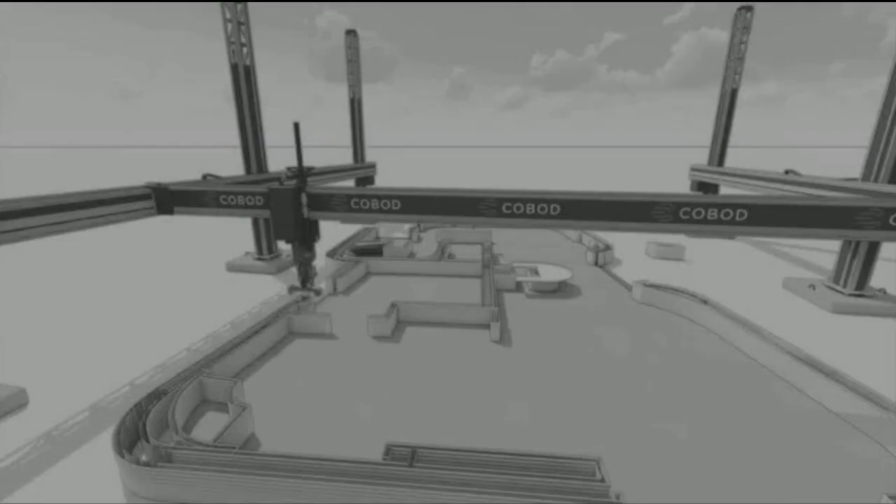3D printing technology is an incredibly fast growing technology which is accomplishing some incredible feats. So, if this is the case, are 3D printed homes the future of housing? Can 3D printed homes reduce the cost of rent and eradicate homelessness? Let's find out.

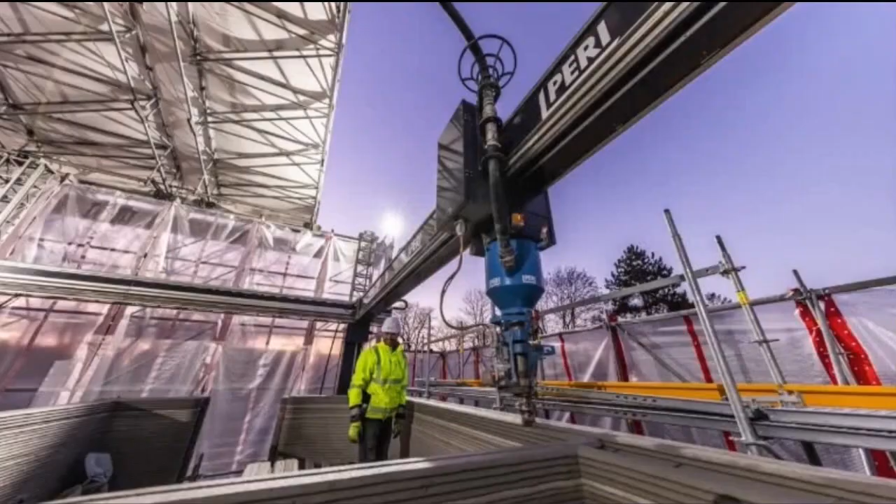When you think of 3D printed homes, you are likely to imagine futuristic homes engineered by technologies made for the world's millionaires. But you may be surprised to hear that 3D printed homes are a phenomenon of the present and are emerging all over the developing world.

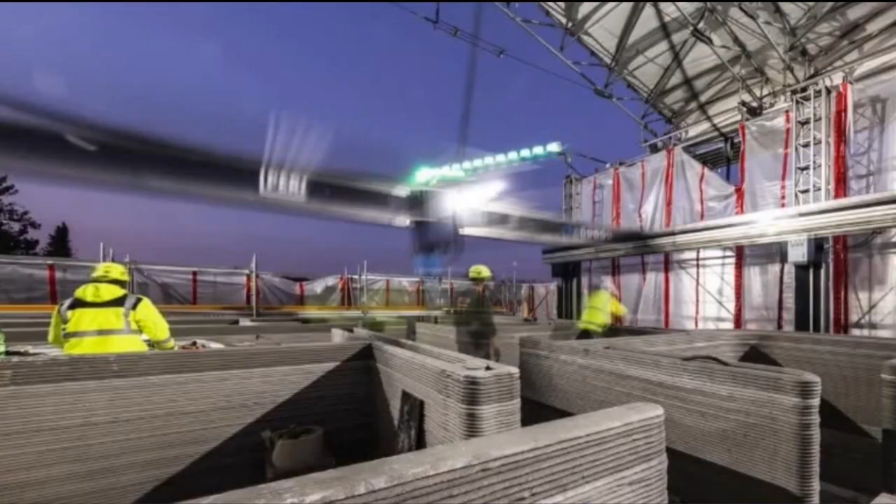The ability to print 3D homes for a low cost is changing the landscape of the developing world as governmental organizations, non-profits and housing construction companies collaborate to serve the homeless and reduce rental prices by creating affordable housing. With all this being said, let's now take a look at how and why 3D printing homes is changing the housing landscape.

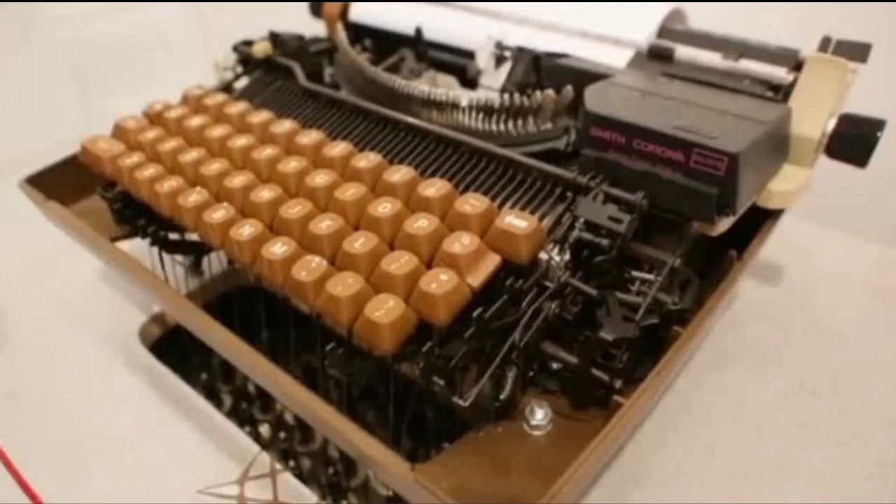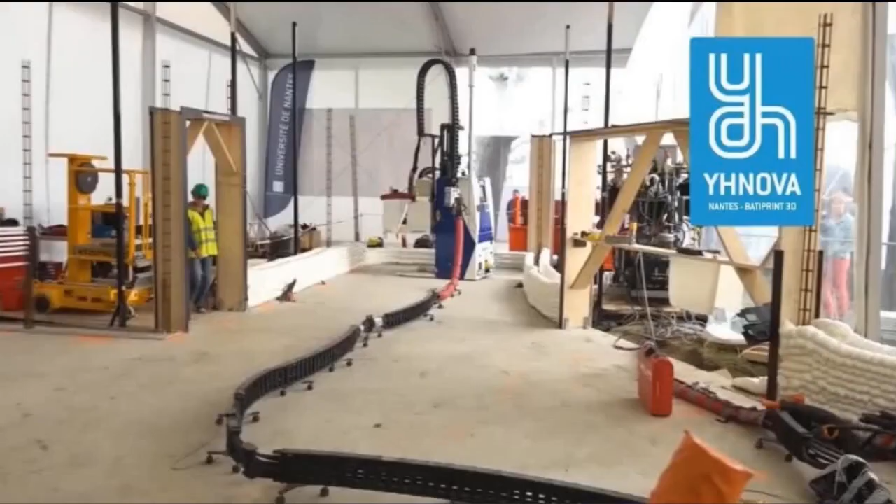If you look back at the mechanism of typewriters, the first machine you can remember that looked like a typewriter, you will notice that the letter formed by the ink sits on top of the page surface. The traditional printer at your home works in the same manner. It prints letters that sit on top of the page surface. Therefore, if you were to print on the same page numerous times, you find out that the ink will stack up on the page. Now, a 3D printer works by capitalizing on this same theory.

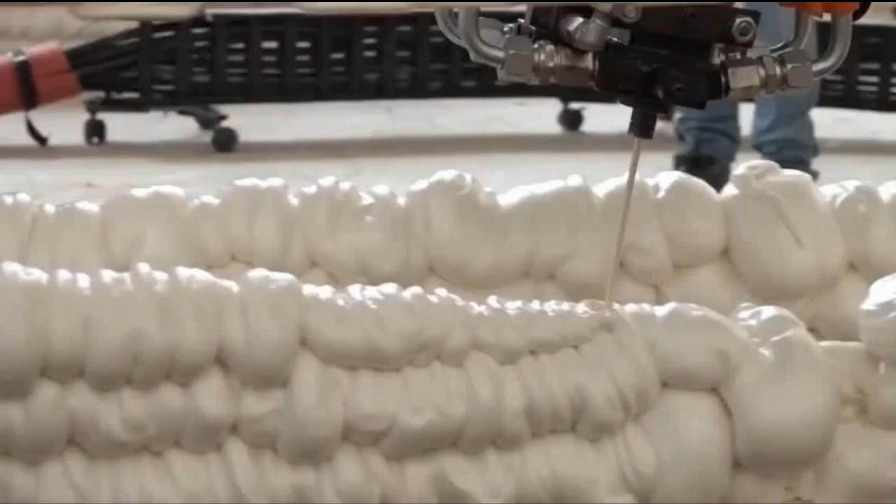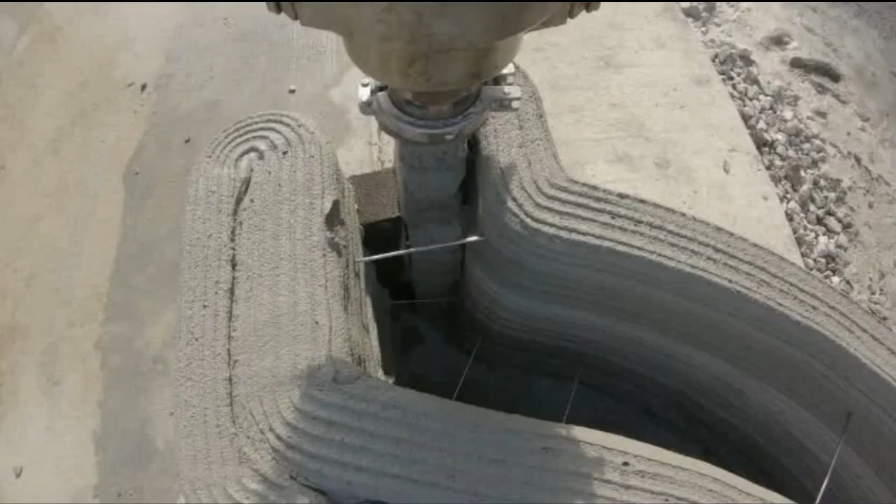It essentially prints thin layers on top of each other until the intended 3D object is formed. It is similar to the process of making a sandwich. When you are making a sandwich, you layer each ingredient piece by piece until the desired sandwich is created. In the same manner, the 3D printer prints tiny layers of materials piece by piece until the desired object is created.

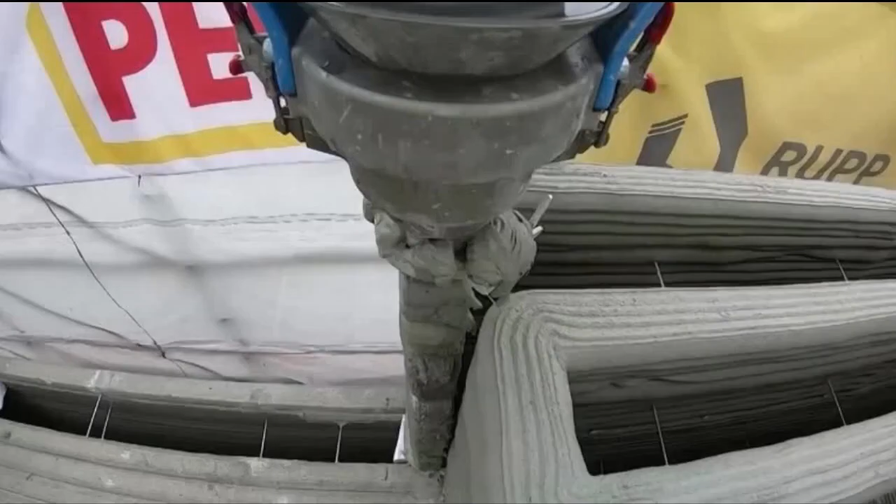Now, you might be wondering, how can a 3D printer print an actual building? Well, that is great - the 3D printer can layer materials piece by piece to build objects. But can it print an entire house? That is the question. Surprisingly, it can. The development of industrial-sized 3D printers has made it possible to print homes in 24 to 48 hours.

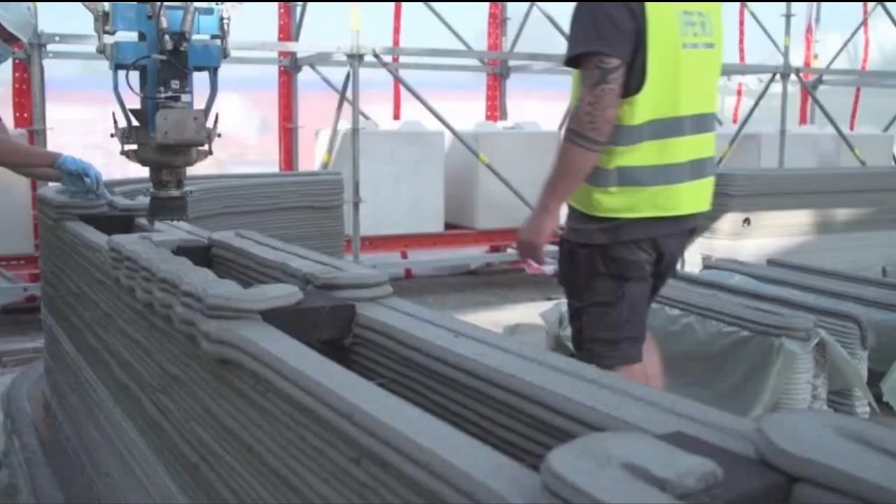The industrial-sized 3D printers print homes layer by layer based on digital blueprints designed on modeling software. It then uses ingredients such as sand, cement, and other additives, or uses sustainable earth-based materials such as soil, clay, straw, chopped rice, and silt to produce a paste-like mixture. This paste-like mixture is heated and squeezed out through the printer nozzle and solidified by a concrete dryer until the basic structure of the home is built.

After the basic structure of the home is built, workers then install finishes such as plumbing, electrical wiring, doors and windows to complete the home.

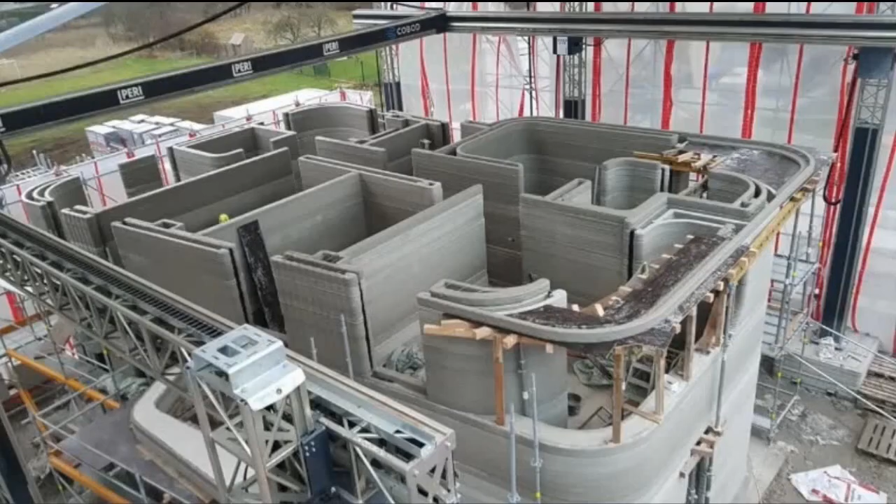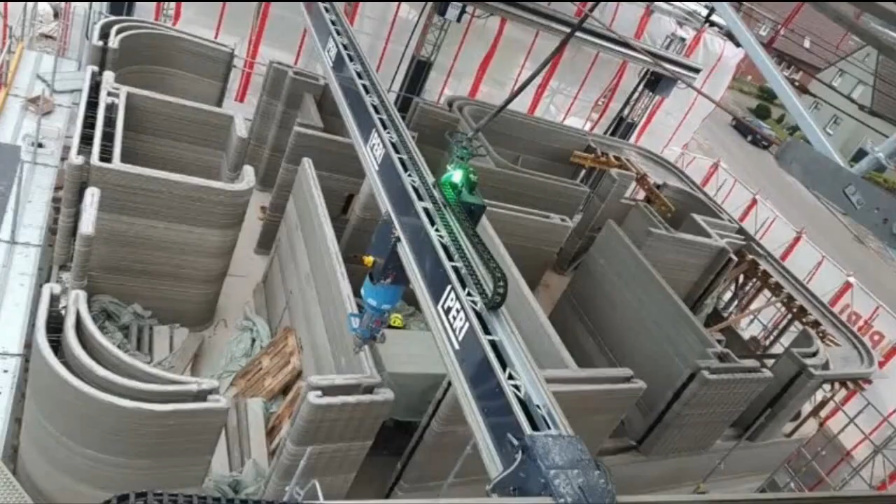Additionally, 3D printers can be streamlined to work quickly and reduce waste. This means 3D homes can be printed in a short time frame and are more cost efficient and environmentally friendly. However, it is worth noting that the printer can only print homes in proportion to its size, and this can result in size limitations. So therefore, most 3D printed houses are generally between 600 to 1900 square feet in size.

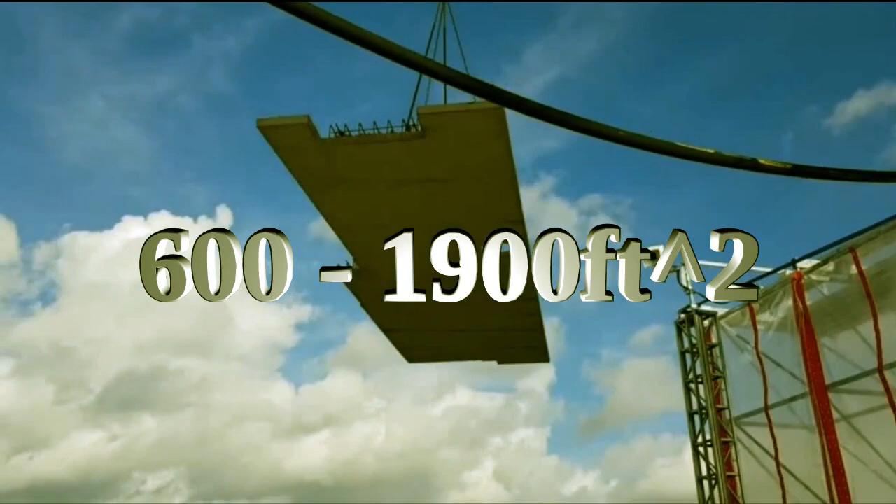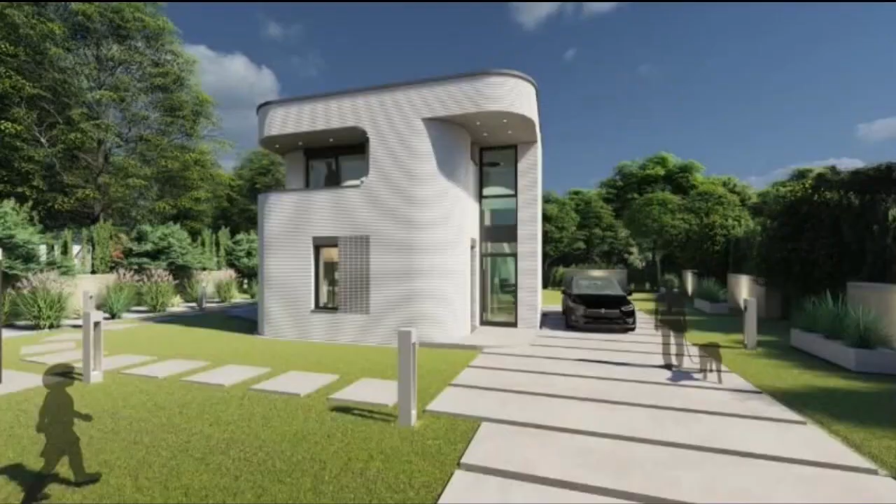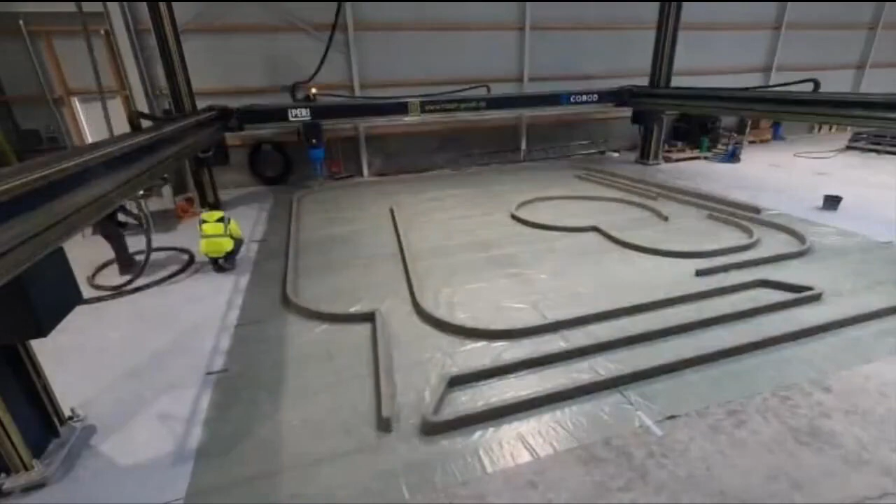The introduction of 3D printing in home construction is revolutionary, but you might be wondering if it will be expensive to build one. It is in fact the opposite. Due to the efficiency of 3D printers, it is cheaper to print homes than to build them the old-fashioned way. And since 3D printers can be programmed to minimize waste, run on limited energy, and can work around the clock, it is both sustainable and time efficient to print homes.

The time efficiencies allow the construction to be completed in a short amount of time, therefore allowing developers to build more homes. Now, to add to this, the reduction of waste minimizes materials cost. It also increases profits and is more sustainable.

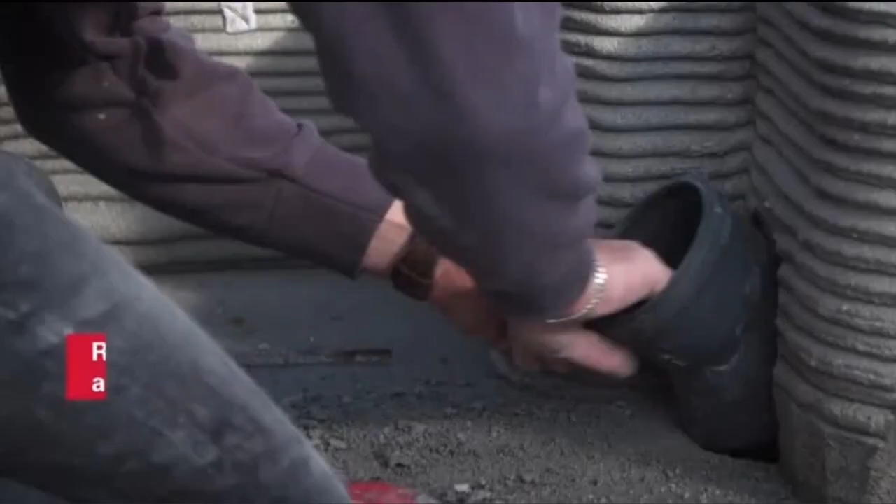This aspect allows an 800 to 1000 square foot home to be printed on average for $4,000 to $10,000, so you can see how cheap this can become. As reported by Business Insider, a 350 square foot tiny home costs on average $25,000 and can cost up to 6 figures with upgrades. However, 3D printing company Icon predicts, based on its developed prototype, that it can build 600 to 800 square foot homes for $4,000 in 24 hours or less.

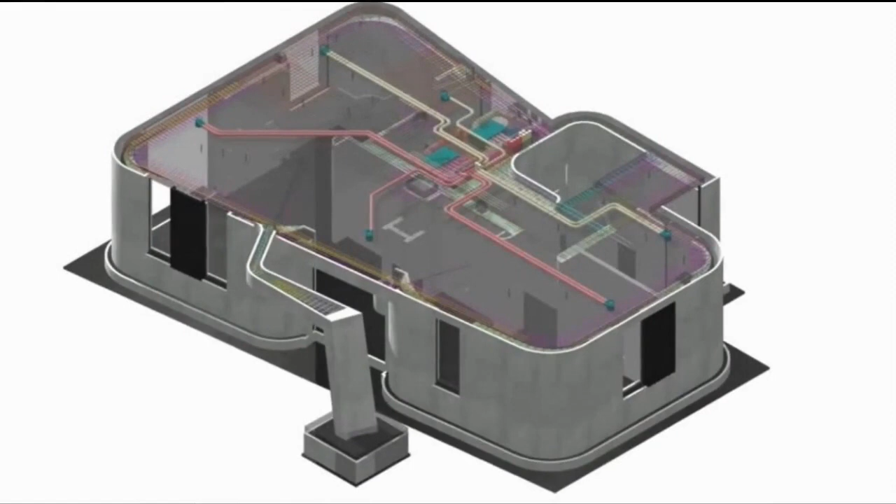Additionally, Icon has reported to the Wall Street Journal that it can print a 2,000 square foot home for just $20,000. Can you imagine building a 2,000 square foot home for $20,000? That would be insane.

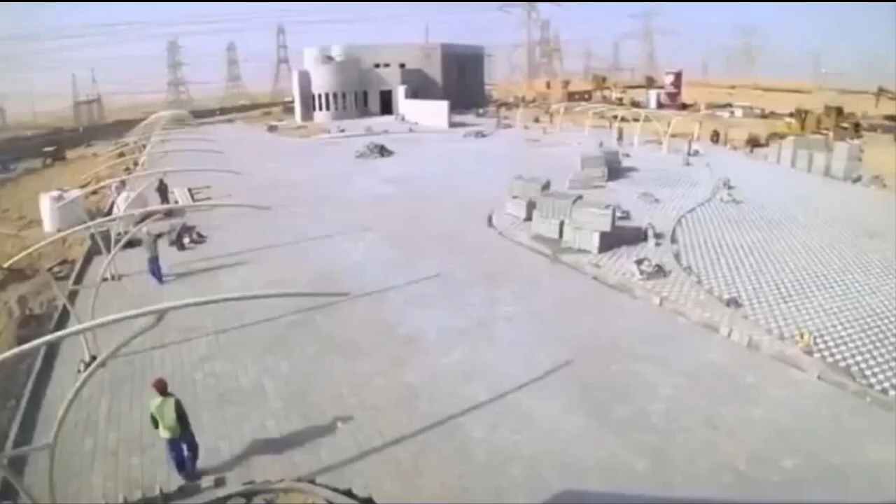According to Yale Global Online, as of January 21, 2020, approximately 150 million people are homeless and 1.6 billion people lack adequate housing, which is 2% and 20% of the world population respectively. Partnerships between 3D housing construction companies and non-profit organizations in the developing world have the potential to alter this reality.

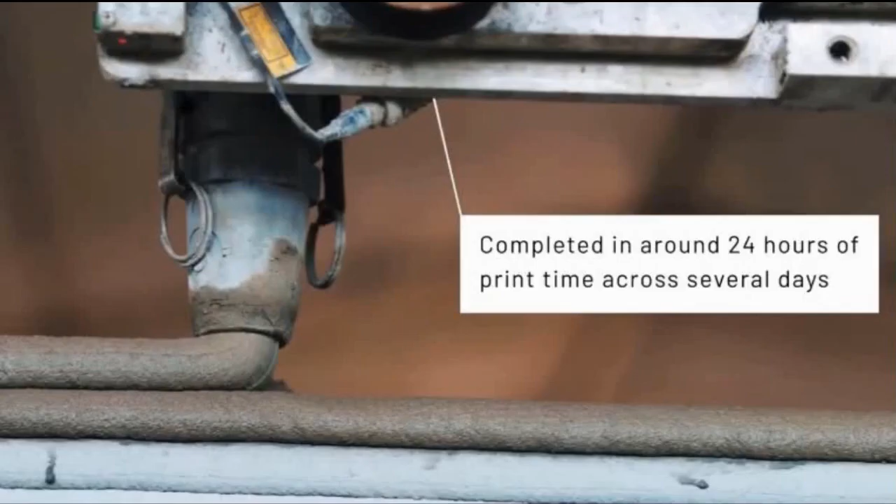In 2018, Icon, a company specializing in sustainable technology and construction innovation, built the first permitted 3D home in America. This home was designed specifically for the developing world, and this has allowed Icon to collaborate with non-profits to provide housing for the poor. For example, Icon, in partnership with New Story, a non-profit serving the homeless in developing countries, is collaborating with the local government in a rural town in Mexico to provide affordable shelters.

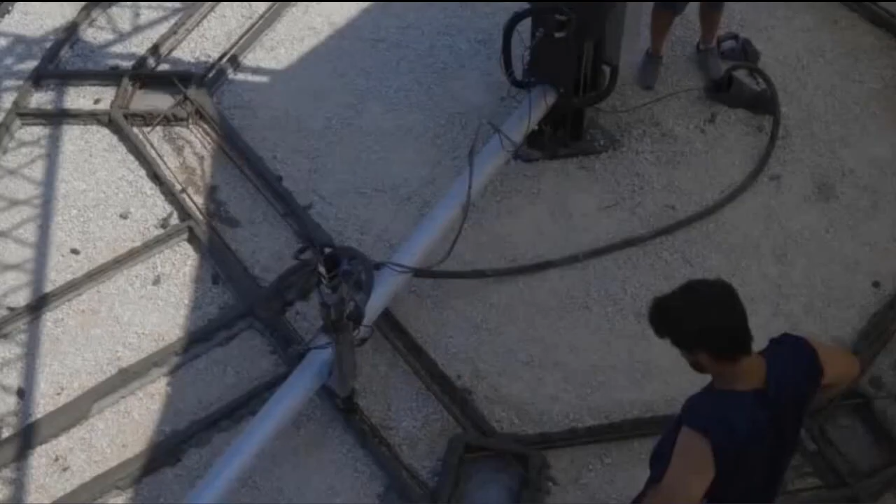To over 500 families. Moreover, there are over 500,000 people homeless on a given night in the United States. Approximately 35% of them, just under 200,000, are unsheltered on the streets, while 65% temporarily reside in homeless shelters. The low cost of 3D printing can provide a more permanent solution to this housing crisis.

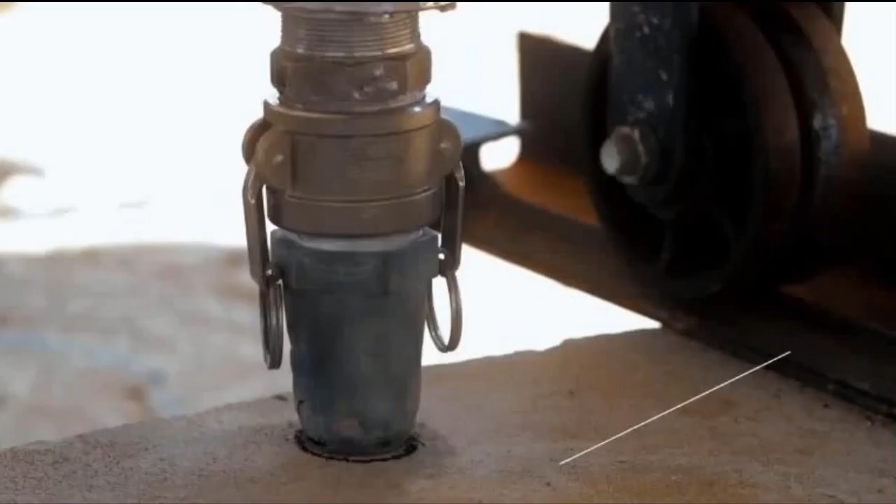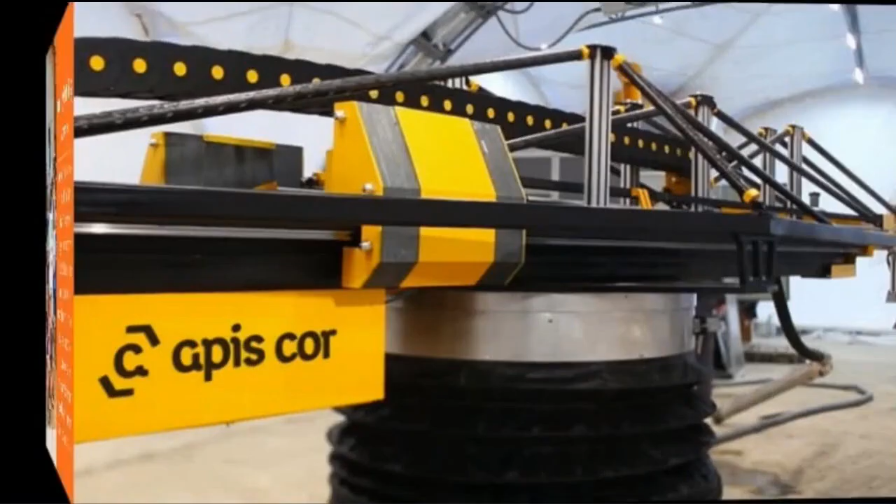Icon has also partnered with Mobile Loaves and Fishes, a social outreach ministry based in Austin, Texas, to print a welcome center in less than 27 hours for the Community First Village, which provides housing to men and women coming out of chronic homelessness. Similarly, Apis Cor, a company applying additive manufacturing to build houses robotically, has also partnered with the Housing Trust Fund of Santa Barbara County to print low-cost, affordable housing.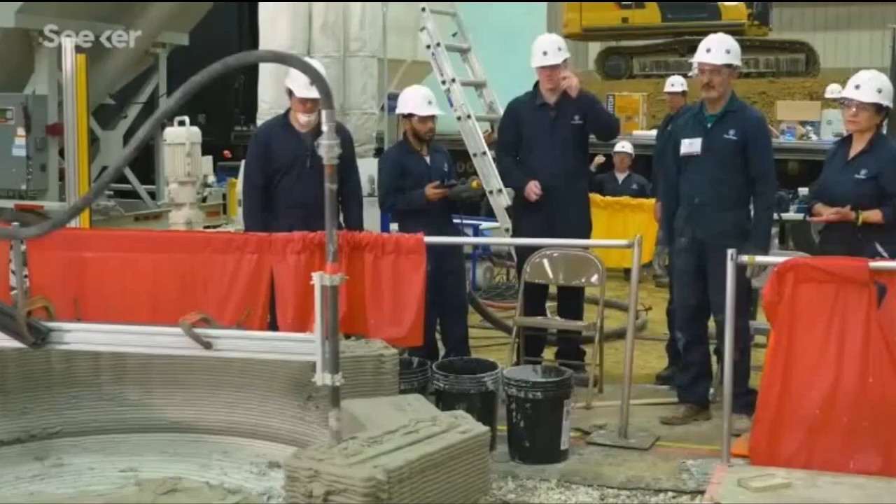As 3D printing technology continues to develop, it not only has the potential to eradicate homelessness, but it also has the potential to reduce rent insecurity and increase home ownership.

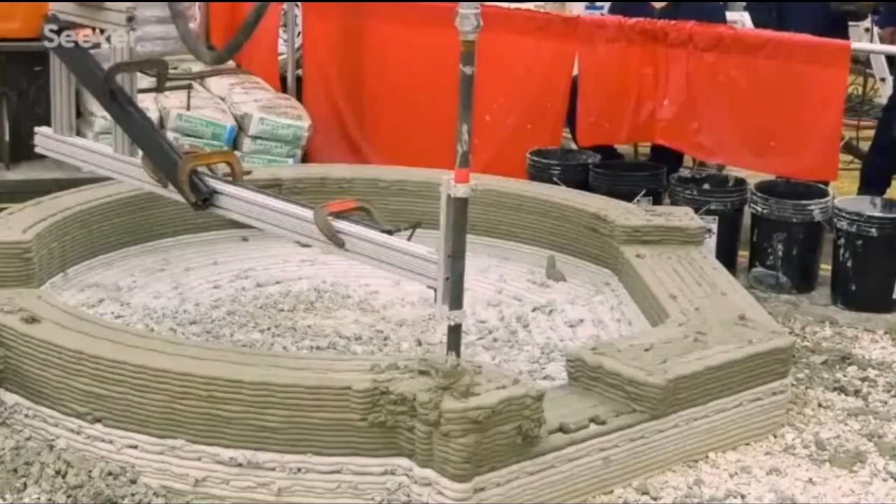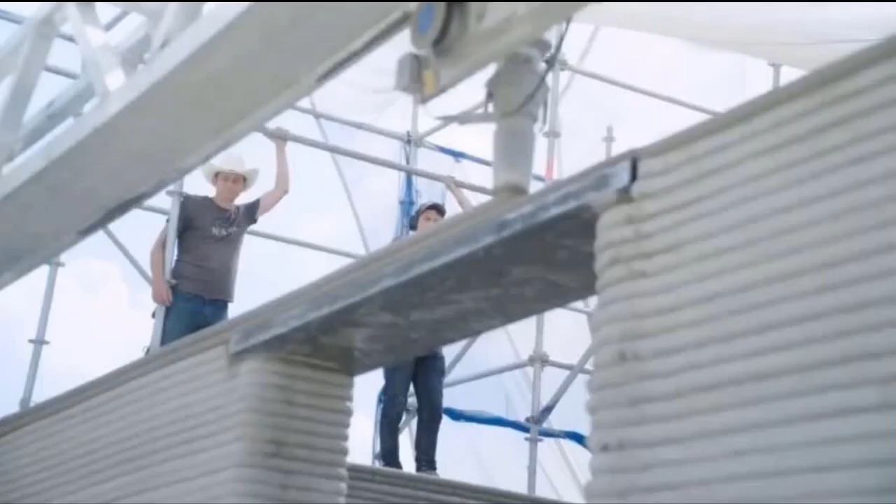In the United States alone, rent prices have skyrocketed over the past few decades. According to the Joint Center for Housing Studies at Harvard University, as of 2017, 20.5 million households in the United States are rent burdened. Rent burdened households on average spend over 30% of their income on rent, not including utilities, and this has tremendously increased the financial burden on households as rent continues to increase and compose larger proportions of their income.

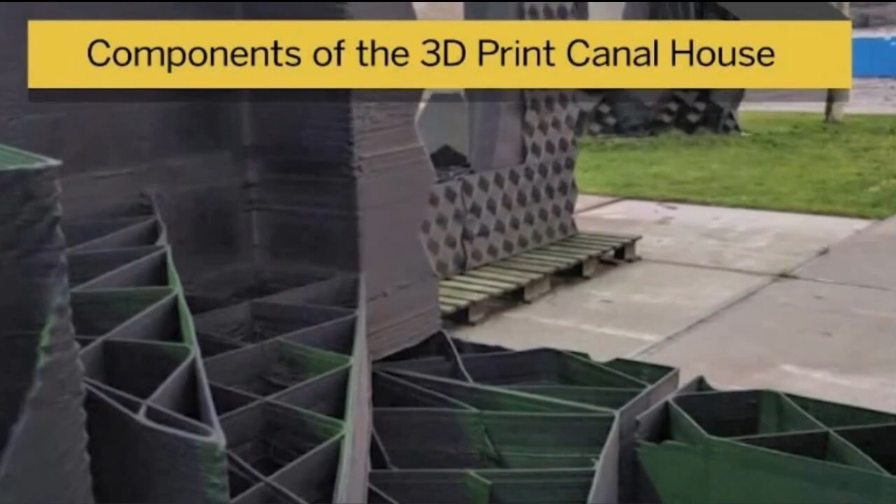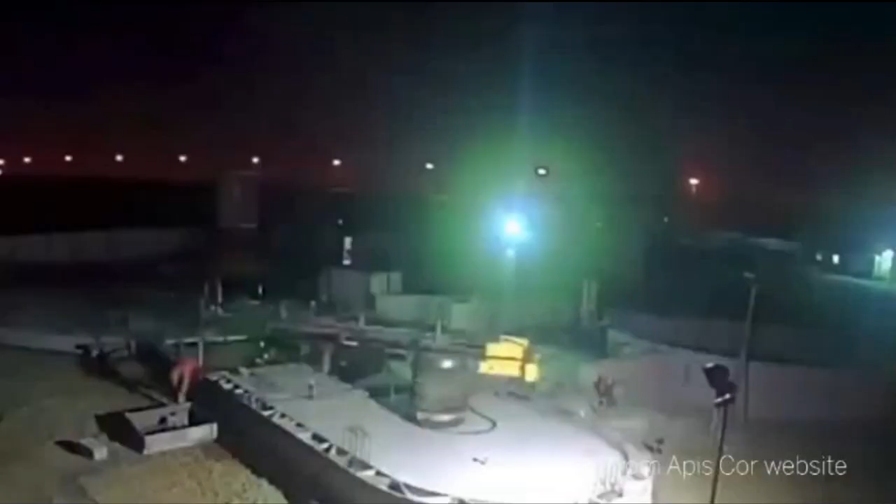However, the low cost of 3D printing has the potential to revolutionize the housing market of the future and allow families to find more affordable housing. The low cost of 3D printed homes can also allow upper to lower and middle class families to increase home ownership by decreasing the overall cost of housing. Therefore, it is possible that as 3D printing technology continues to develop, it could define the trajectory of the future housing market.

So, what are your thoughts on these 3D printed houses? Do you think this technology is going to change the way we build in the future and possibly reduce homelessness and change the developing world? Or do you think this technology will be another decorative footnote of architectural history?